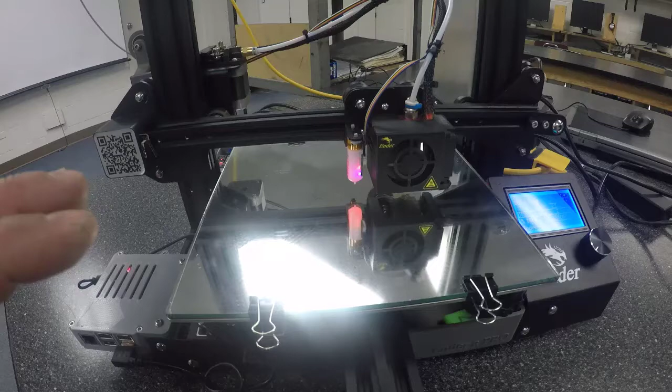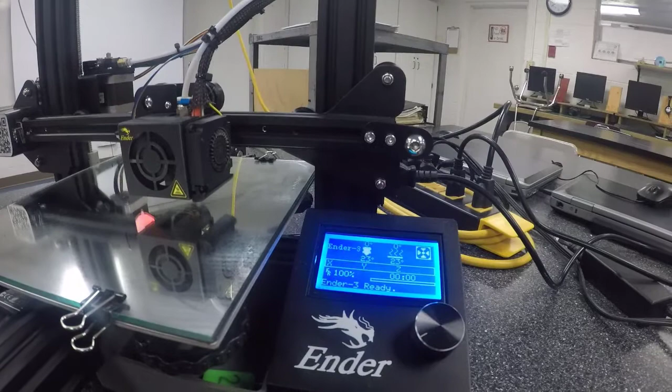Marlin has no idea where the program has set 0 or 0 point, so we need to auto home. I'll click here, prepare, and auto home, and that will start the auto home sequence.

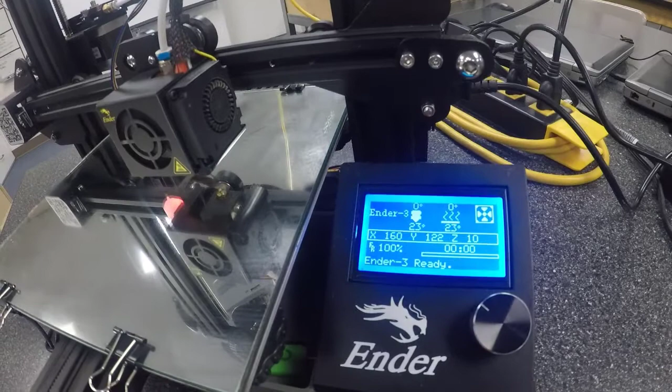So I want to show you something on our screen. Right now you see that Z has been moved up 10 millimeters, and the reason for that is because now it thinks it knows where 0 is. But I want to show you something: 0 is where the point of the probe touches the plate. And then when it pops back up, that's where it thinks 0 is, between the end of the probe and when it's stowed.

But the nozzle, back up under there, actually is higher than the probe. So when we're within that range of the probe being all the way down and all the way up, the nozzle needs to be somewhere in between there. And then we need to tell it where that is, or else it doesn't know where the nozzle end is.

So we look at this, we've gone down or raised up 10 millimeters. Theoretically, if we lower it 10 millimeters, that's where the BLTouch right now thinks the end of the nozzle is. So we're going to test that and see if it's true.

So I'll click here, go to prepare, and move axis, move Z, and I'm going to scroll down so that we're on 0.1 millimeters. You'll notice that it says my Z is positive 10. It raised up 10 and stopped there because it thinks that when it goes back down to 0, it'll be at 0.

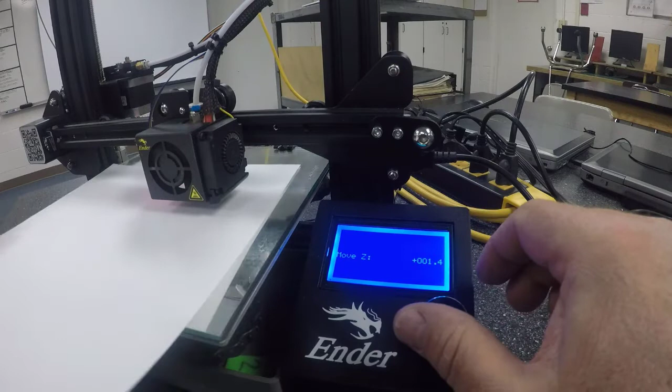So let's take a piece of paper and we're going to put that in there between the nozzle and the bed, and we're going to lower that by turning it to the left. Since I'm going one-tenth at a time, it's going to go pretty fast. So when I get down near 1, 1.5, it still moves easily. So we'll go even further, down to 0.4 or 0.5, still moves easily.

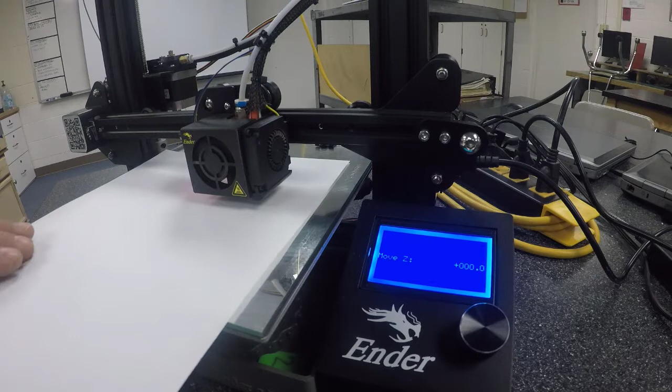So I'm going to take it clear to 0, where the probe thinks the nozzle is, and we see that it's not touching the paper still. Remember, how we need to adjust this is to lower the nozzle until it pinches the piece of paper barely. So we're going to continue turning Z in the negative direction. I already have a pretty good idea, but you don't, so you'll need to do this pretty slow.

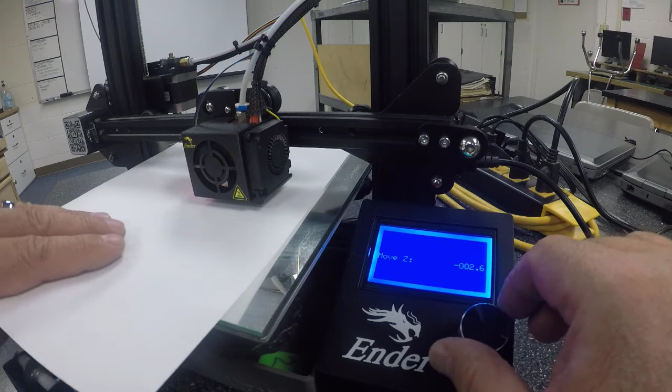We've gone 1 millimeter lower, 2 millimeters lower, paper still moving. And right there at 2.8. If I go to 2.9, it still moves barely, but it's pinching it enough it could maybe tear. So if I go up to 2.8, that moves pretty easy. 2.7's even a little better. 2.6 is too loose. So I think 2.8 is going to be the winner there.

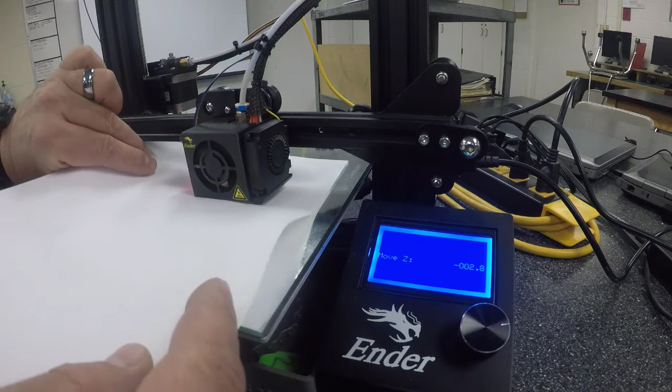That still lets me move it barely, so that should be my new Z offset. I need to set the Z offset, or the probe Z offset, so that it knows that it needs to go an additional 2.8 millimeters lower than where the probe thinks 0 is.

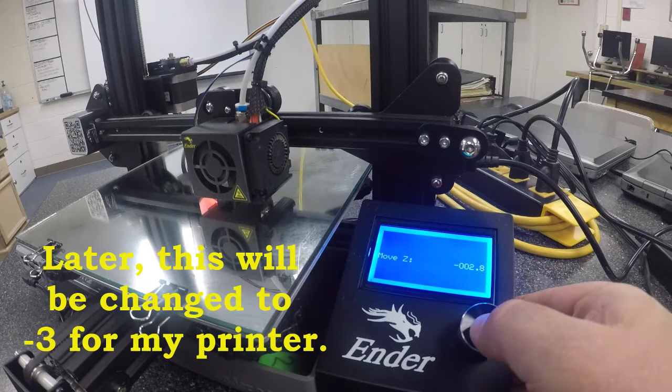So to do that, we're going to push our button and get out of this menu. We'll go up to the next menu, clear up out of all these menus to prepare. We just need to remember that minus 2.8 is our magic number.

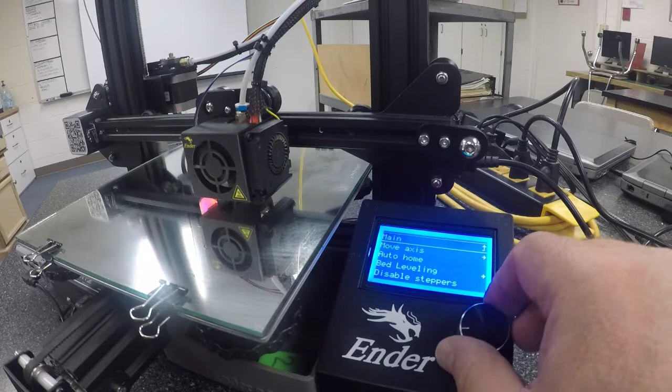So there we are at our home screen. I'll click here and go to prepare, and I need to auto home again because at this point nobody knows where anything is.

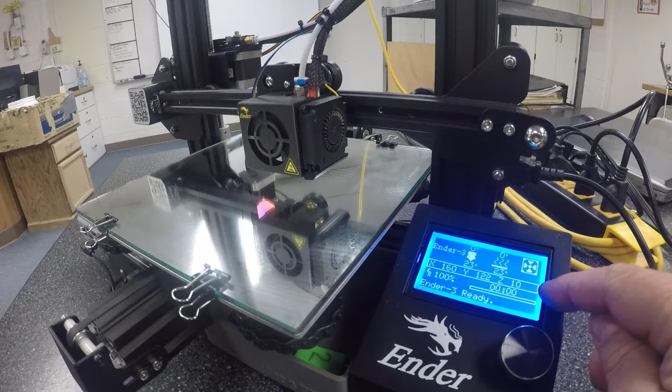So again, it's auto-homed, it's stopped in the center of the bed, thinks it's 0, but on our screen again we see that it's gone up 10. We know that it needs to go down 12.8, because if we add 10 to 2.8 and then it goes down that much, that will put the nozzle right where we want it.

So to store our new Z probe setting, I need to go change it. I'll click there, go to prepare again, and we're going down to bed leveling this time, and we're going to the probe Z offset.

And you'll notice I get a little graphic that says if I turn this way it's going to raise it, if I turn the other way it's going to lower it. So I'm going to turn the other way and I'm going to lower it 2.8.

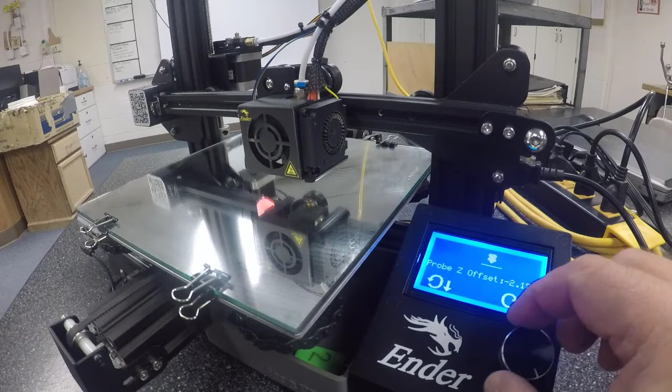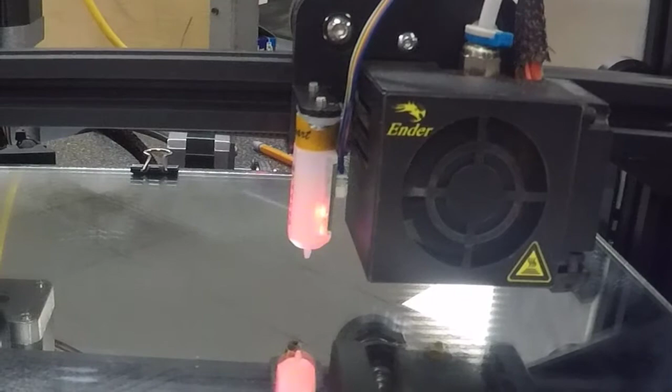So right there, then I'll push the button and scroll down on that previous menu and go to store settings. Now nothing really happens, but if you watch the BLTouch, you'll see that it just flashes red to blue, and that means something happened.

So with that set, those are stored. I need to come up here. It says bed leveling off, and I want to push that to turn it on, and then it defaults to level the bed. So I'll go back to prepare, go to auto home, and we'll auto home one more time.

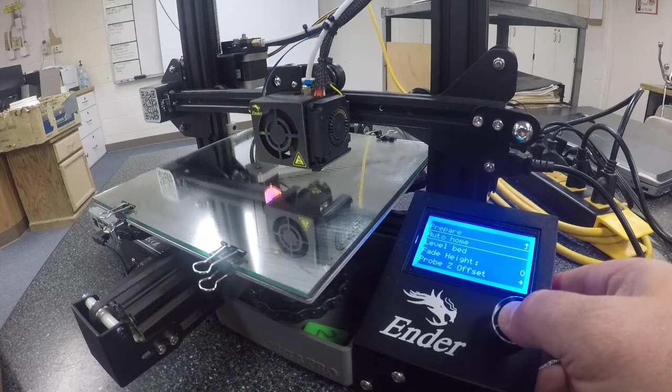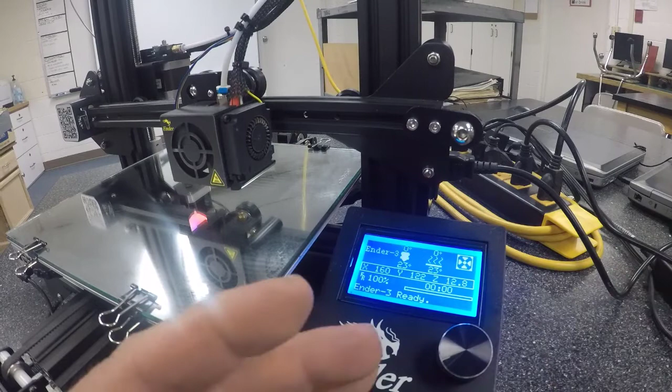And this time, instead of Z at 10, we see that we have Z at 12.8, meaning after it homes and goes to print the first layer, it will lower 12.8 millimeters, which should put the nozzle right at the correct position.

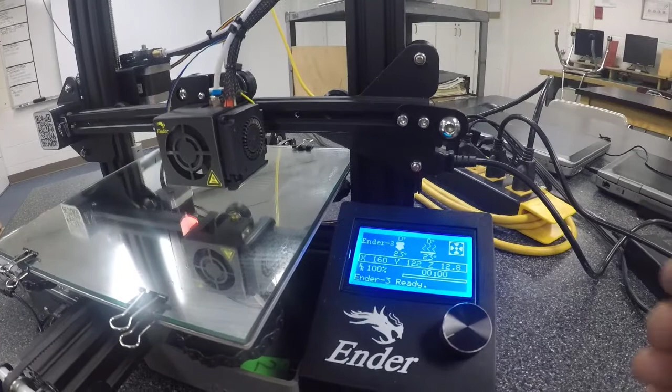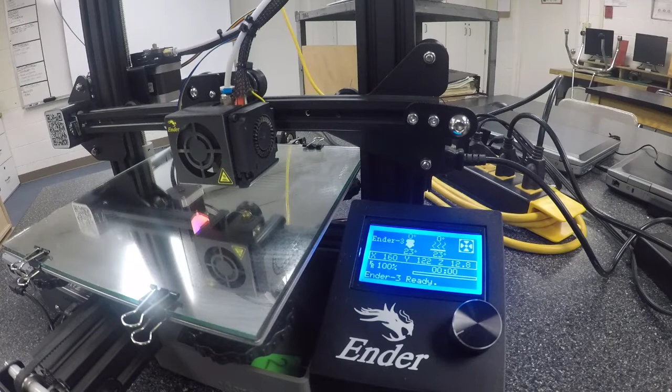Of course, at this point I would clean and spray the bed, and then we're ready to go. Now there is some code that I will show you in a couple of minutes that we have to add to our Simplify3D when we slice, so that it knows we want to do BLTouch or auto bed leveling, and that will then become part of every program if we want it to. We can also set it so it doesn't.

So I'm going to press here, go to print from SD card, and it's called bed leveling X 1 millimeter, so I'll click that, and now my bed will begin to heat up, and it will take us a few minutes before it's ready to print. So I'll bring you back when it's ready.

Now that everything is about heated up, it should zero, go back to home, and then it'll begin the print, and we'll watch how well the first lines stick to the plate.

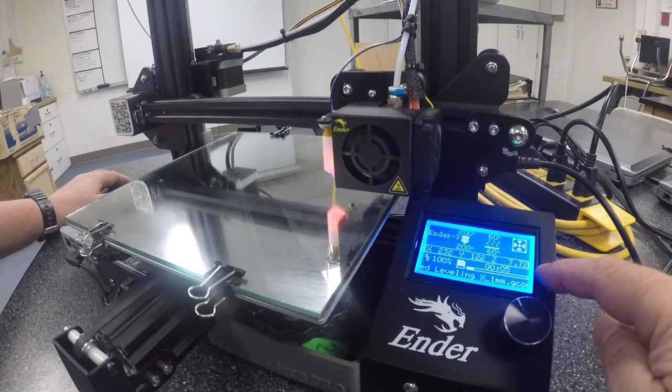It'll start out by doing a grid probe. You'll notice at each point Z changes, shows us what the height was. So 7.78, 7.89, the back left corner is 7.71, 7.54, and 7.36. So you see we have some variation in our leveling on our bed.

That's the beauty of this, is it can be crooked and still work. So at this point it's going to home and then begin the print process. It's made the mesh of the bed and it knows where zero is, so this should be a pretty good print.

Right now it's doing the skirt, and if I feel where it's done it, I can feel that it's pretty high. I'm checking to see if the squish is about right.

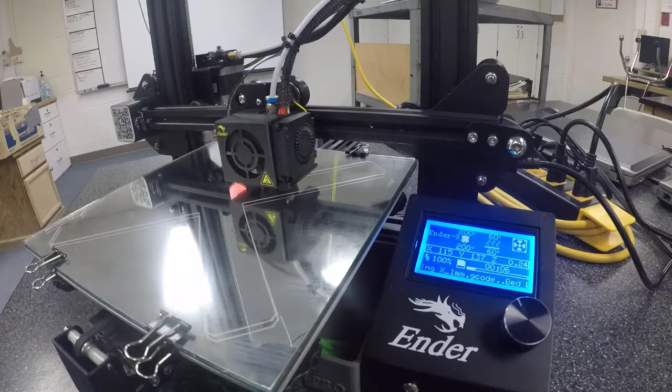And then it'll begin with the object, which is just a single layer print that I made in Inventor. And it looks over here like it's squished pretty nice.

So after it does the first few lines, I want to check and see if it is squishing enough to overlap each other and make connecting prints. Otherwise, just a pile of spaghetti ready to happen when I pull it off the plate.

So we'll give it a few rounds here, and then we'll double check and see if things are sticking like they should. As I look down on top of it, it looks like we're just about perfect as far as squish goes.

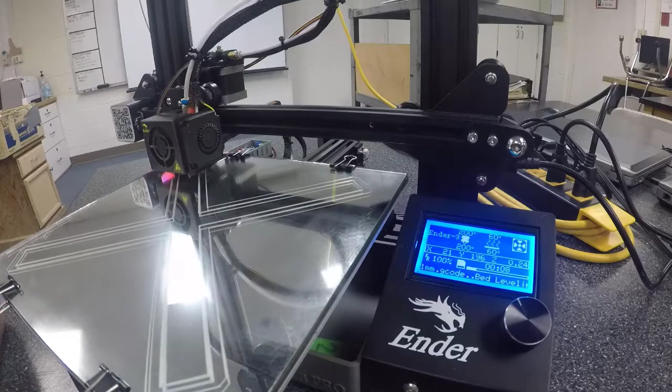Right here, it's not quite connecting, so I'll show you what we can do about that in a minute. But these top two layers look like they were about right. So right around this corner and down, we have space between our lines, which means our squish is not quite deep enough.

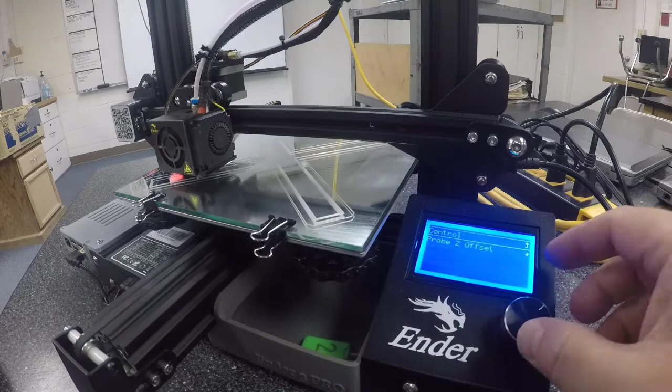So what we can do, even while it's going, is go to Control, Motion, Z Probe Offset, and right now we're at the 2.8 threshold. We're going to drop that down just a little at a time. We'll go to 2.9 and see how that goes when we go around this next corner again.

Okay, now that looks like it might be bleeding over and sticking a little better, but we'll let it go one more round and see if it does still.

Usually when you have gaps between each line, it's because the squish isn't wide enough. That means we're not close enough to the bed. So I see we still have a gap there, so we're going to lower this even more. We'll go about 2.95 and see what that does for us.

If the little gold feeder starts to pop and back up and back off, that means we've got it too close to the bed, most likely. It's trying to squirt out more plastic than it has time to, and we need to back it off again, back up to 2.8 or so.

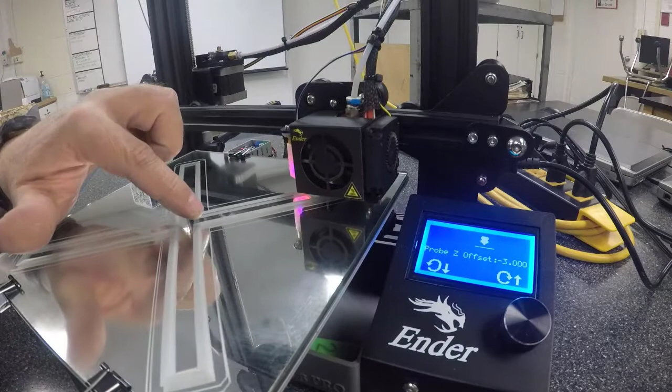So we still have some light spaces between those, so I'm going to take that all the way to 3, and we'll try it one more time here. Alright, now it looks like these two are bleeding together again, which is about where we want it.

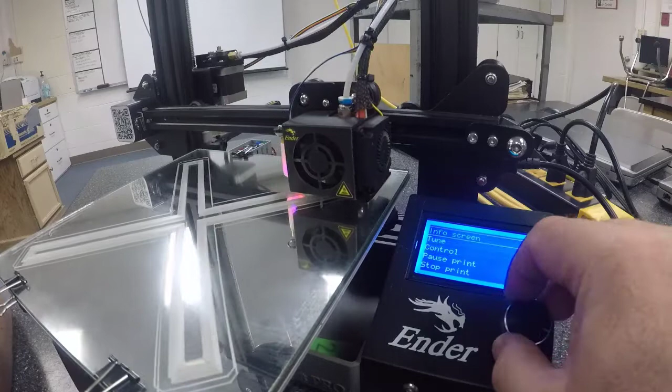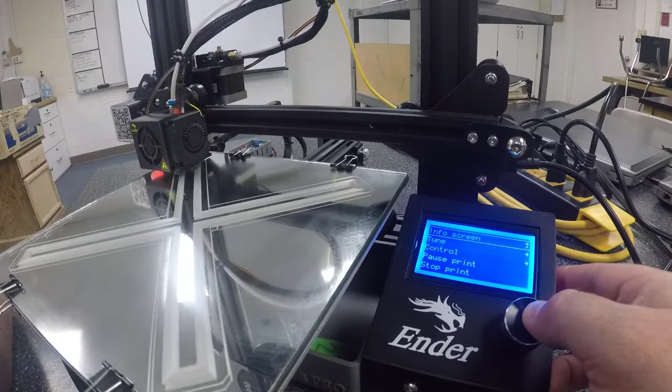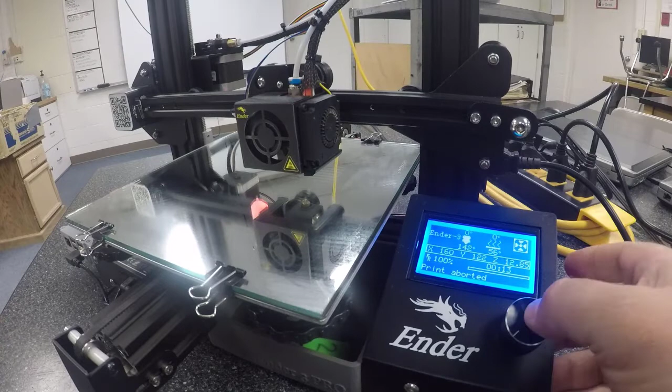Now I just need to go store it, so I'll go to store settings. And then I'll go auto home, and that should take it back home. And then I will peel some plastic off this, maybe. And then we'll try it again before everything cools down too much.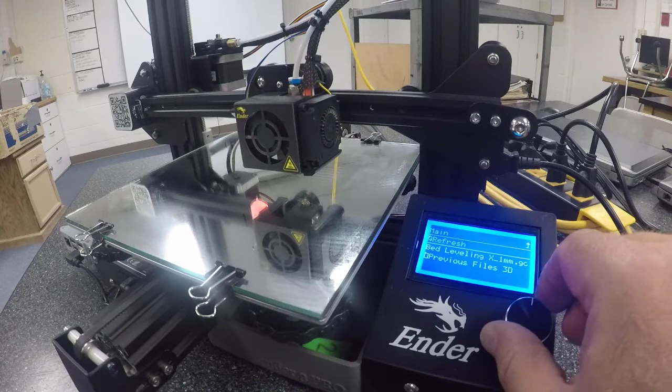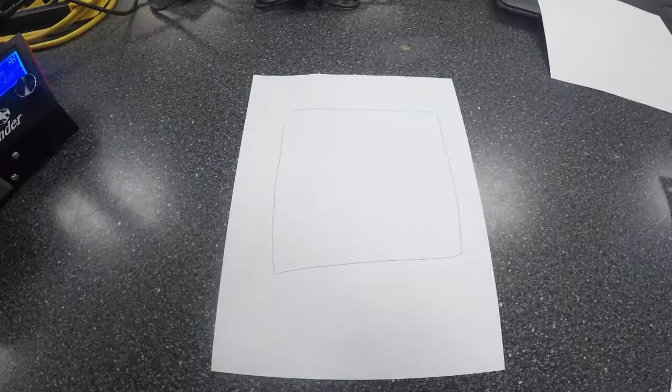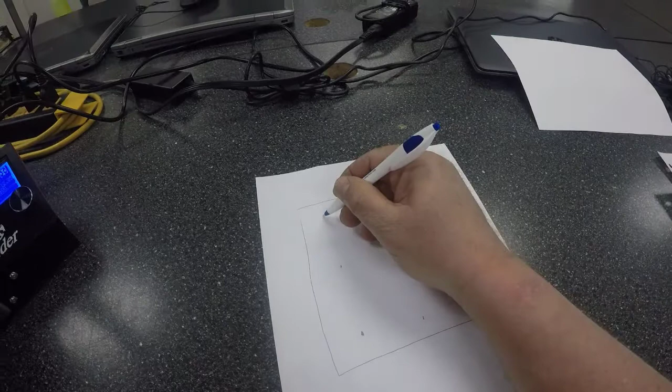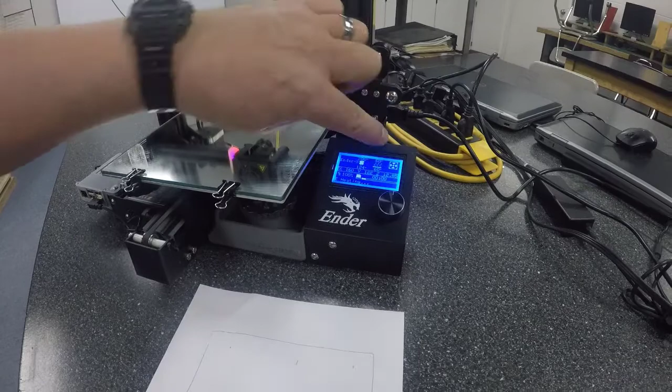Now once this starts, I want to have you do something. While that's heating up, I drew a picture of my bed, and it's going to probe in four different places. I'm going to put a little dot for each one that it's going to probe. And as it probes, I'm going to watch my screen over here for Z height, and I'm going to write down the number that flashes up there so that I can tell where the high side and the low sides of my bed are, like which corners are high, which are low.

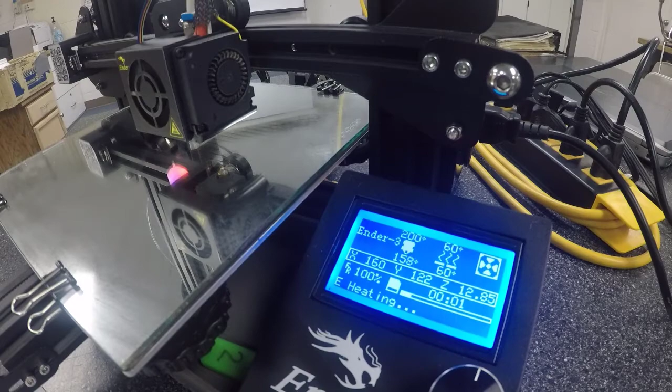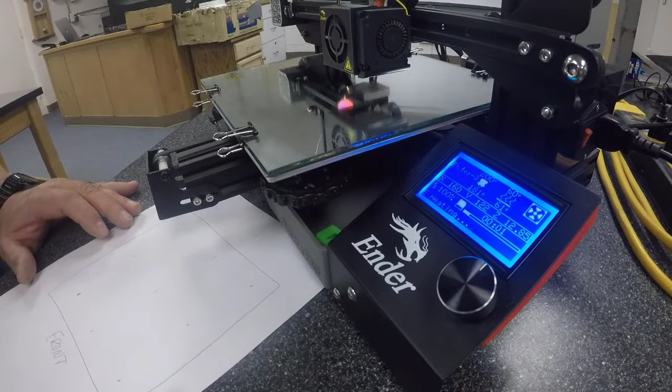You might want to label this front just to give yourself an orientation, and then we'll go ahead and watch our screen. I'll try to get this close enough you can see that and what I'm going to write here. So at each point I'm just going to write the height the bed shows me when it probes.

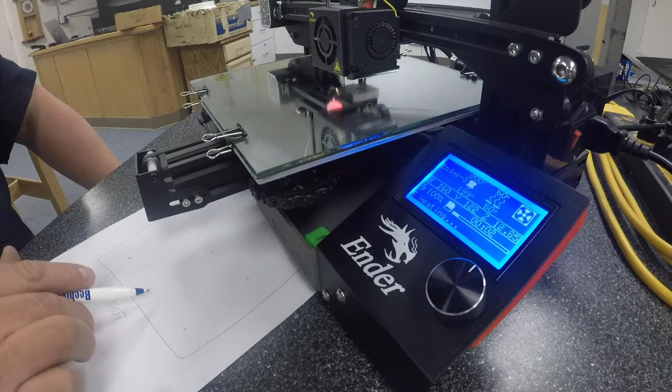We're almost there on our temperature. So the first probe will be in the middle of the bed to give it a reference point. After that, it'll go to each one of our individual points.

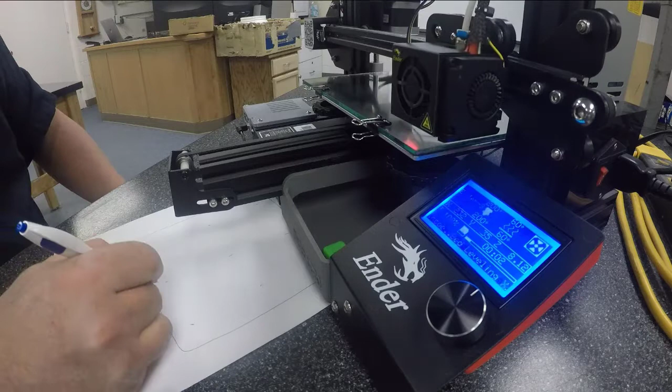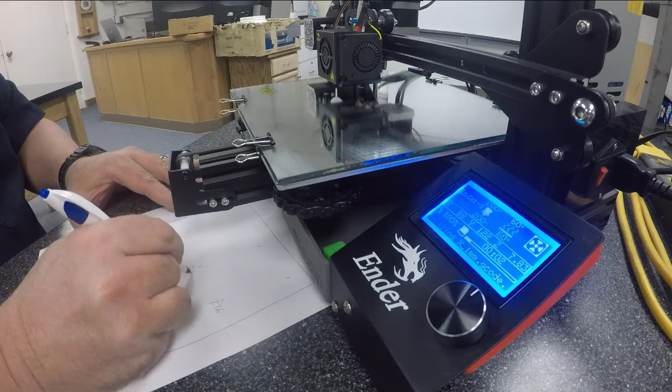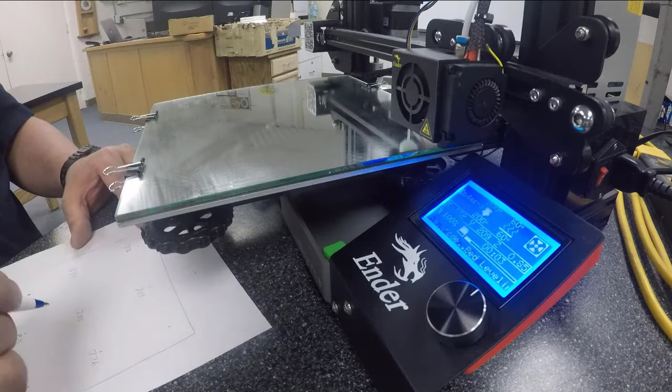So our first point is right now. It probes, and it said that one was 8.08. That other one is 8.12, 8.15, 7.76, 7.83, 7.93, 7.76, 7.59, and our last one is 7.41.

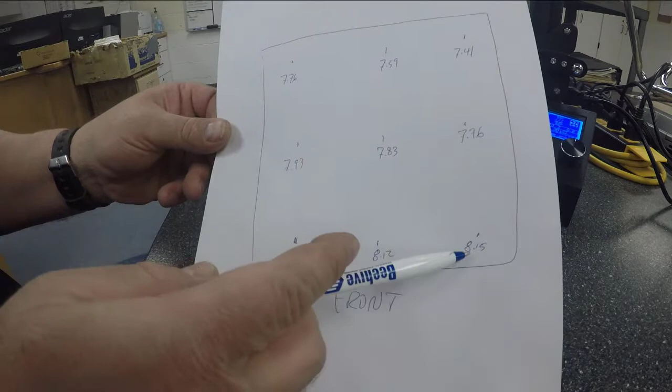Then it goes and rehomes itself, and it will begin to print. But I want you to look at this paper while it's doing that. 8.15 is higher than 7.41.

So remember how we said we could use these knobs to lower or raise the bed to get our bed a little closer to square before the probe does its thing? That may be what we need to do.

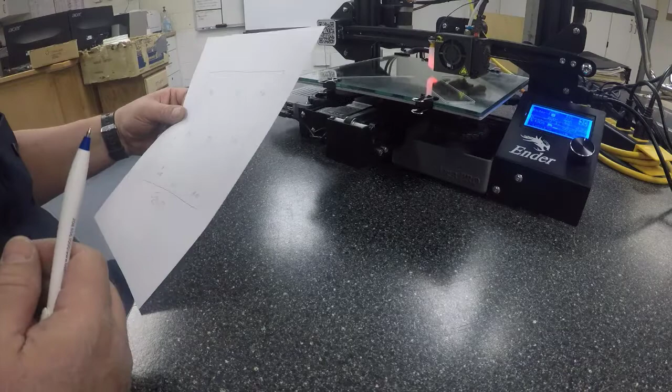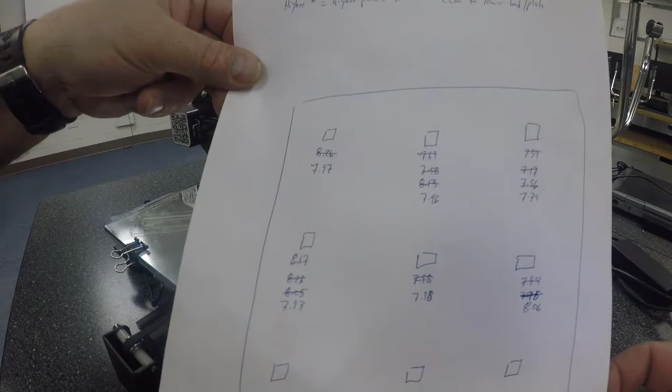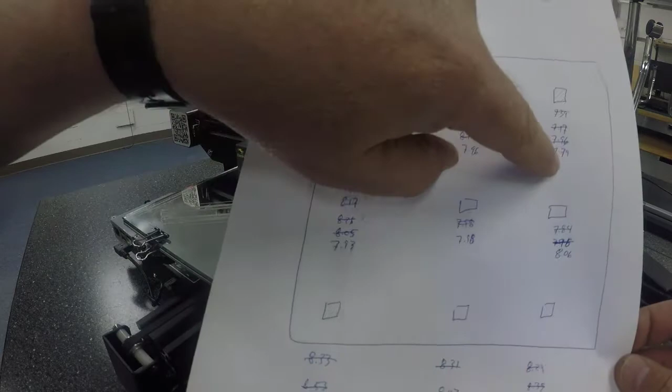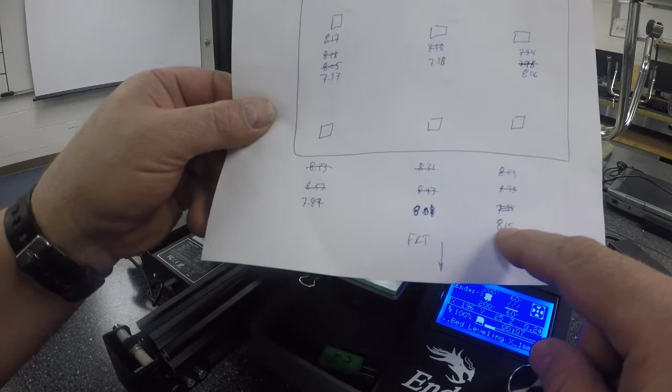But it gets it a lot closer, and as it prints, the print is a lot better, except over here in this corner where I have a greasy fingerprint that it popped up on. But the rest of it, the squish is just about perfect. It's blending into each other, connecting. So I think our level of -3 for our Z probe offset is about right.

And it takes a little playing around, but this should give you the basic gist of how to do what we're trying to show you. Once you have this set so that you get a nice first layer print, you don't want to mess with your knobs again until you're able to go into Octoprint and maybe turn on the bed visualizer.

I'm not sure we'll get to show you that just because we can't do it from our school network anyway, but it would be something to look up on YouTube. Just type in Octoprint bed visualizer.

I like to go through the guy called Teaching Tech, and he has this as one of his favorite extensions that he installs, and it makes kind of a little graph that shows what the bed looks like and where it's out of kilter compared to the rest of it. So I'd recommend looking him up. I might post that just as a reference so you can go watch it.